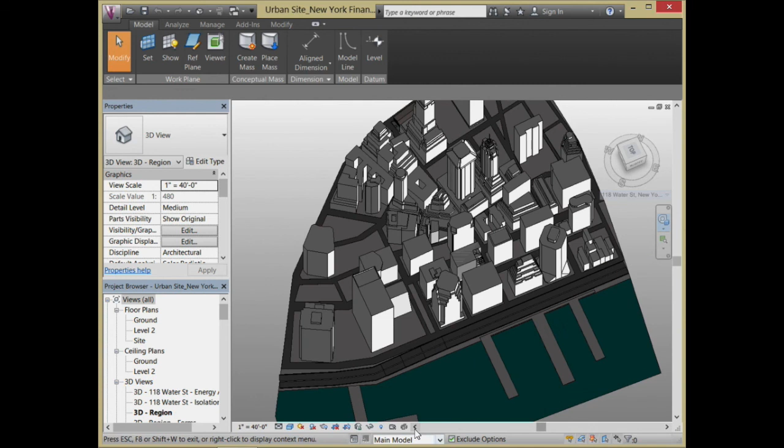Okay, just to give you a sense of how this works. This is a tool. This is a basic little building model of New York City. The idea behind this example is that we want to design something for this space. There's a site which is downtown, and within that we can take a look at some different potential towers that we could put on that site. So we have one tower that they call the Sail, which looks something like this.

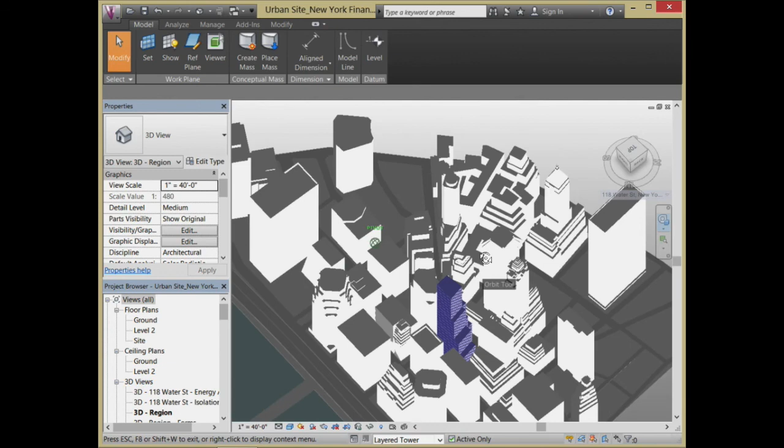Let me open up another one. Something called the Layered Tower. Let me orbit around that one. This is kind of like everyone's old vision of what New York used to look like. That's a trapezoidal tower. You can hardly see that. That, if I looked at it from the top, is more like a trapezoid.

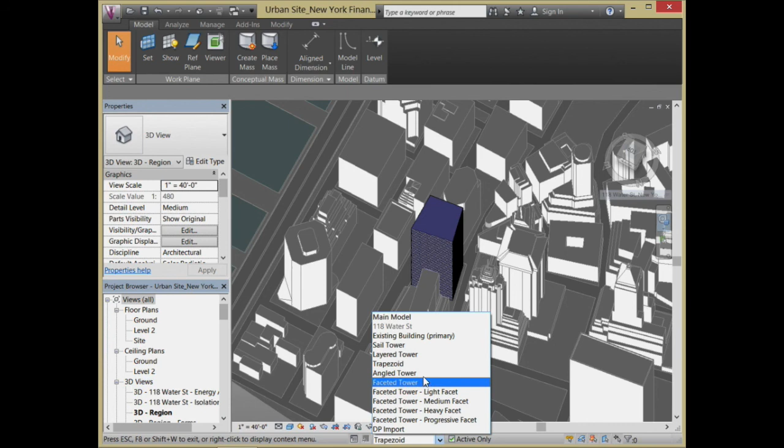Angled, kind of like two angled elements passing up past each other. Faceted, all the way up to heavily faceted. That actually looks like some towers you see built today.

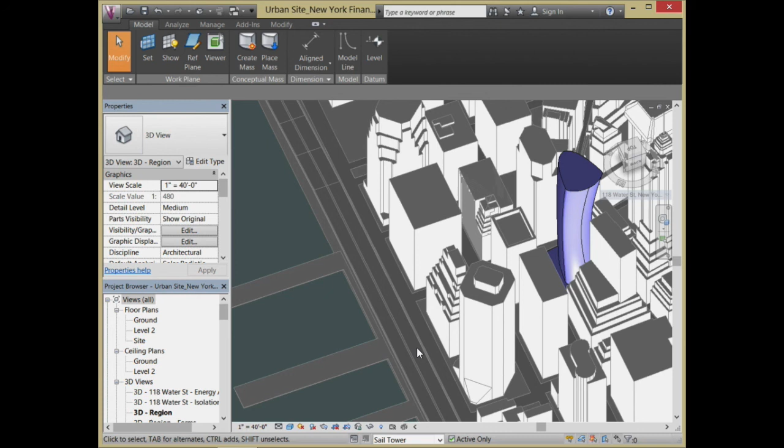And finally, progressive facet. Okay, so given all those different towers, if all of them deliver the same amount of square footage, the same amount of usable space, the question is, how do you decide which is really the better design? And that's what we're going to try and explore in this course. Let me talk about how we do that, just to set a context for it.

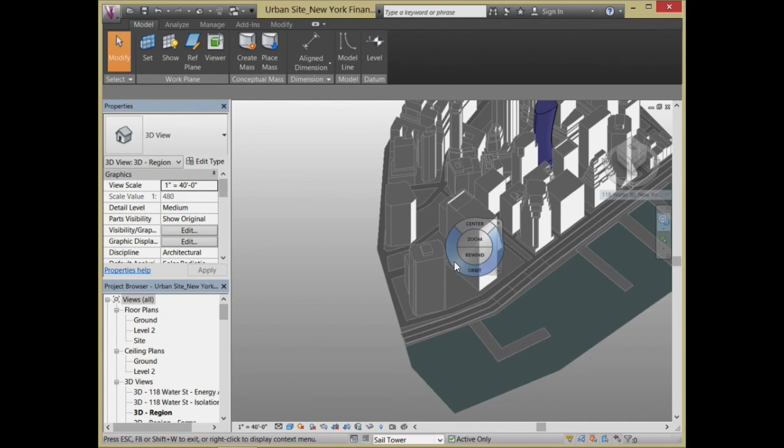The idea is, as we're thinking about these towers, or just about any design, it turns out everything's amazingly dependent on context. And that's where we're going to start off next time. Because the answer we would get for a tower and what would make the most sense for New York City would be different than what would make sense for San Francisco or Abu Dhabi or Shanghai or Singapore.

All these different locations will have slightly different answers to what actually makes the most sense. And it's based on the local climate conditions, the wind conditions, the sun conditions. All those things factor into what's going to be the best design for that local context. So what we're going to learn to do is, for each of our design options, always put it in a specific context.

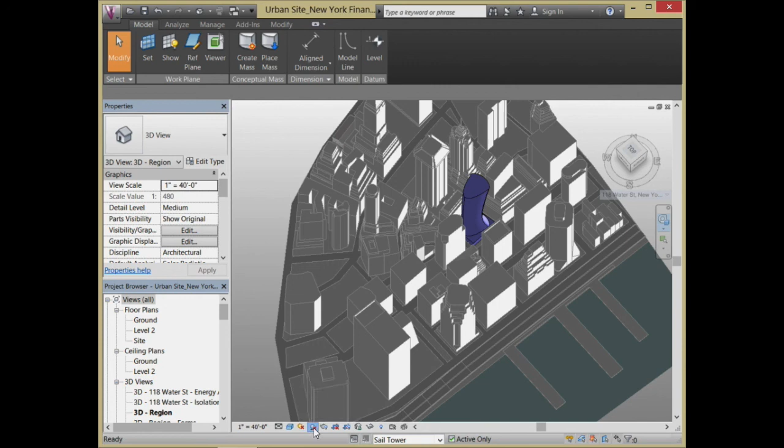A specific context that'll let us do things like, let me turn on the shadows here for a second, cast accurate shadows in terms of what's happening with our building, or look at the whole notion of, let me pull out here.

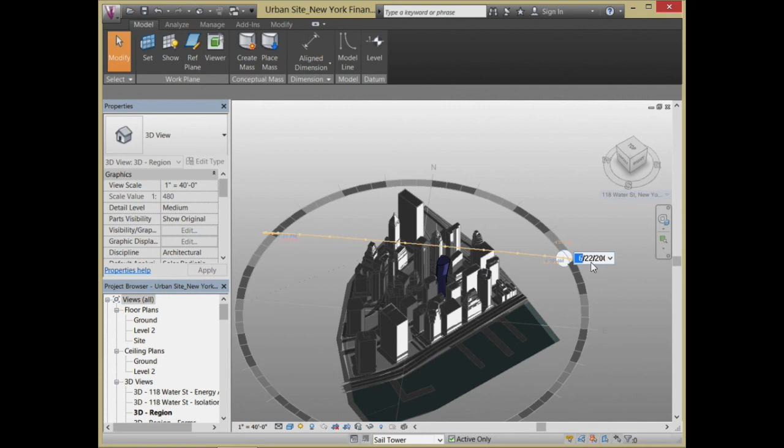What's happening with those shadows at different times of the day and at different times of the year. So for example, in June we have a certain set of conditions. If I go ahead and move myself over to December, we have a different set of shadows that are being cast. But you'll find out that's actually very, very sensitive to the location where we are. Right now we're in New York City, so in New York City you're starting to see these long shadows that are cast because we're far enough north. We have a high enough north latitude.

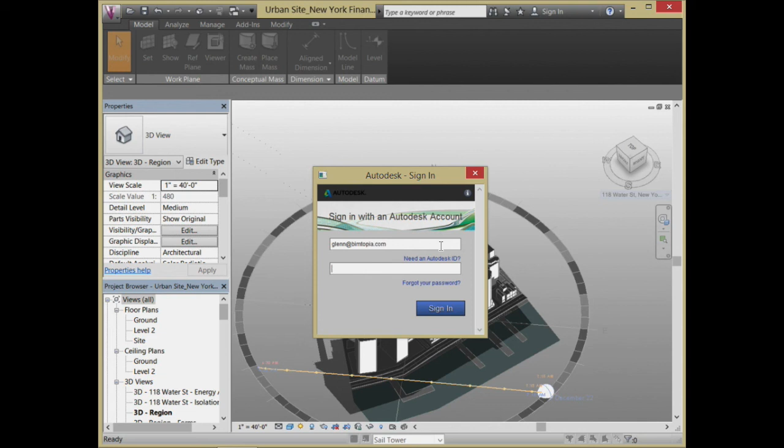If I went through and switched that, let me try that. Okay, log myself in here. Okay, give me a location that's much closer to the equator. What's a good city that's near the equator? Quito? Okay, let's try it. What's the latitude in Quito? Well, it's in Ecuador, so I'm assuming it's very close to the equator then.

Okay, very good. You notice there's different weather stations relative to, what's that? Is that the proper name of Quito? Or is that a different city? No, that's a county. Canton means county. That's fine. That'll work? Okay.

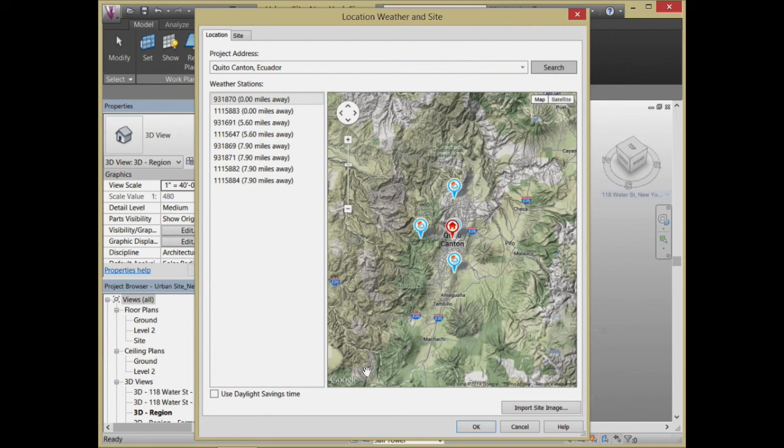There's different weather stations. There's data about weather all over the world. What's going to be important, there's a latitude and a longitude associated with this. Let me go ahead and pull that in there. Okay. And now, this is interesting. I'm early in the morning. Let me go ahead and pop up to later in the afternoon.

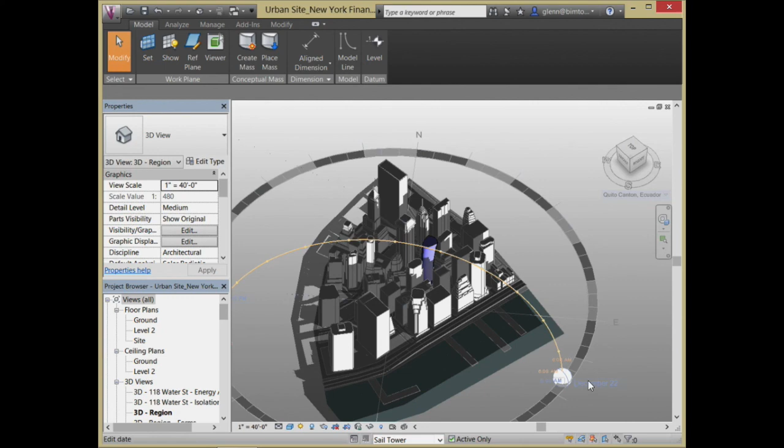That's way in the morning. I went the wrong way. 5 a.m. Oh, don't do that. No! Okay, forget that example. As usual, software will crash on me. The point is that really, as you're thinking about sun and shadows, the whole notion of location really is important.

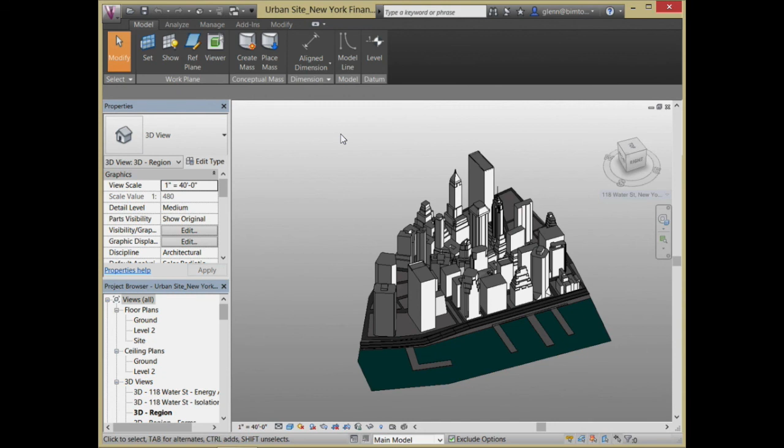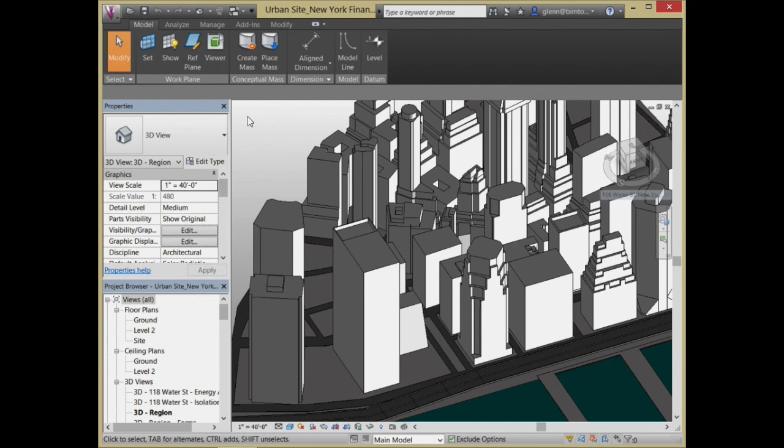Let me show you some of the other things we start thinking about relative to performance-based design. For example, here we're looking at New York again. There's this whole notion within the city of what is the effect, in a complex urban space like this, of solar radiation from all of these buildings, how do they all work together? And there's actually good tools available that let us do that. If we have a context for placing our buildings, we can start to analyze and understand the amount of sun that's hitting an individual surface. Let me show you how that works.

So there's a whole suite of analysis tools available to us. They're all about informing our design. One thing is the amount of solar radiation on any surface. That can be really useful for understanding how much solar radiation is hitting our surface, then we know a little about how much potential we have for photovoltaic generation on our own surface, or we could think about how we're shading other buildings, which is also a very big impact in terms of a lot of the planning we do these days. So I'll just select a relatively simple one.

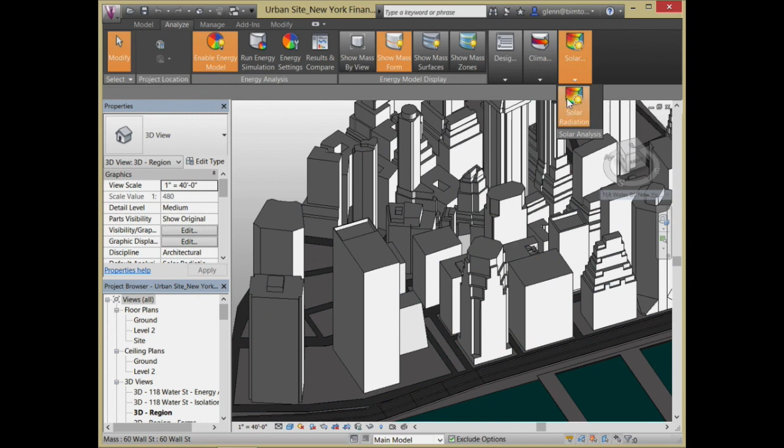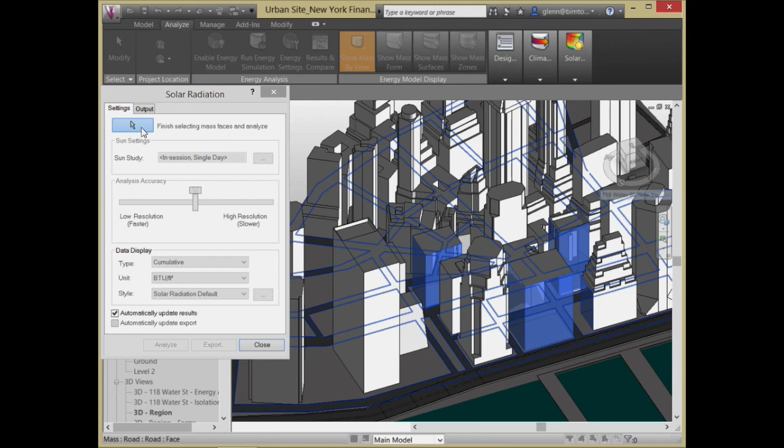I could do it for almost any surface in the model here. But the idea is that we could just choose some surfaces. Let me grab that surface and this surface, and I'll grab that one over there, and some of these ones that are down in the canyons. Okay. What we'd like to do is understand a little about the solar radiation and very quickly get some feedback.

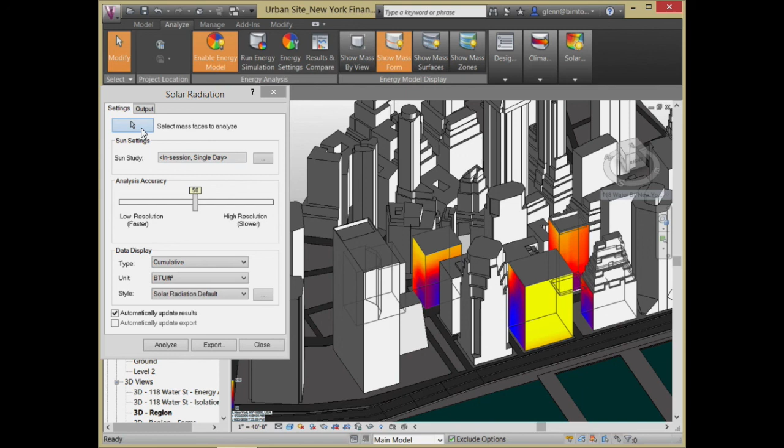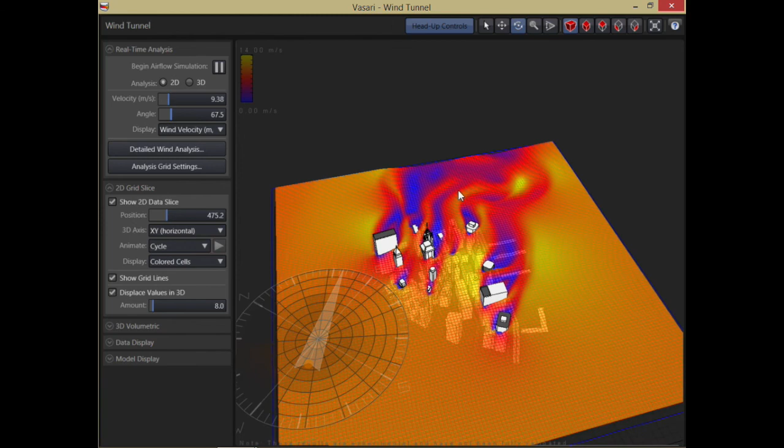Right? And that's the kind of thing we want to start thinking about. For any different building design that we propose, what is the impact of the solar radiation? One of the other things we're going to start looking at, though, is something like this. Okay, this is that same context. This is actually a wind tunnel. Let me go ahead and just pull that down a little bit so you can sort of see.

The idea is, in this case, the wind looks like it's coming from sort of the southwest over here. You're starting to see that there are different high velocity zones and different lower velocity zones. In certain areas, like right in here, we have a real little wind tunnel. Also coming up this way, we have a little wind tunnel going on there. There are some spots that are a little bit deader.

And we can be thinking about this at the city level. We could be thinking about it at the building level. So as you're thinking about a building and trying to figure out, is that rooftop garden actually going to be bearable? Is anyone ever going to be able to sit up there? Or what times of the year can they sit up there? You can actually start analyzing and determining these things.

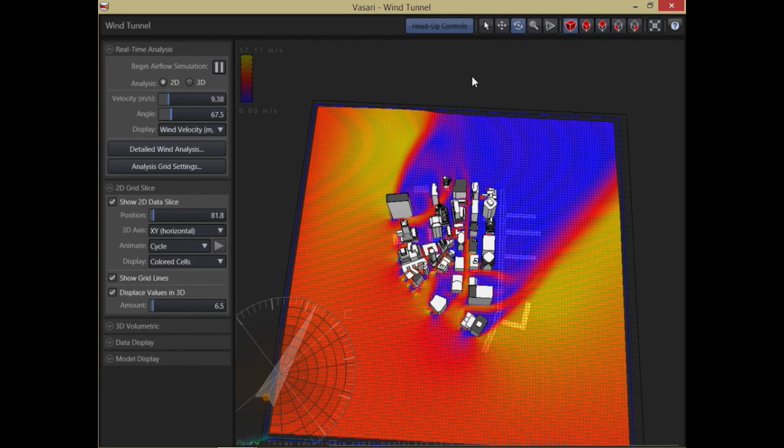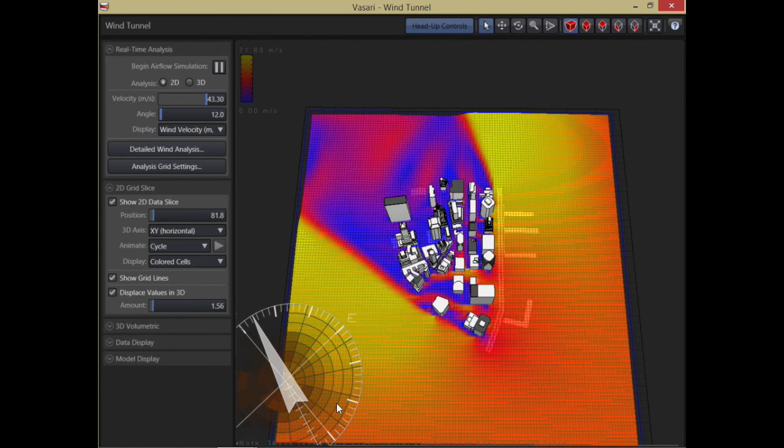Go ahead and I'll pop this around. If we want to go through and, for example, change the wind to, come on you, there you go, a different direction. We can go ahead and do something like that and really understand what it's going to be like. And this is not really arbitrary. It's actually very deterministic. Let me show you how this works.

For a specific city, there's something called a wind rose, which will show us at different times of the year, in this case the entire year, what is the predominant direction of the wind and what is the intensity of that wind. In New York City, it looks like the predominant direction is from the northwest here. That's probably the most predominant direction for the wind. So if we're looking at it year-round, that's the effect. What's going to change that around a little bit?

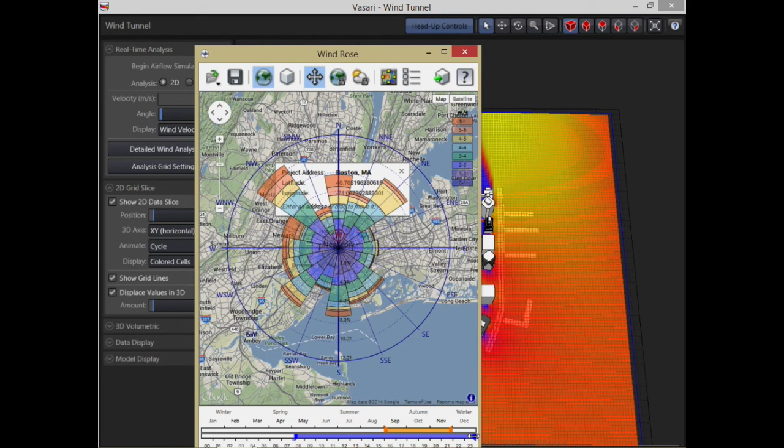If I'm looking at it in the wintertime, you'll see that it's actually coming from the west-northwest. If I'm looking at it for the summertime, though, it changes quite a bit. It's coming from the south. If we look at autumn, it's coming from straight in the north. And even there, we could look at different times of the day. This is from midnight till midnight. If we want the daytime effect, let me look at the wind direction from, say, 8 to 5. Okay, it changes a little bit. It's still predominantly coming from that direction.

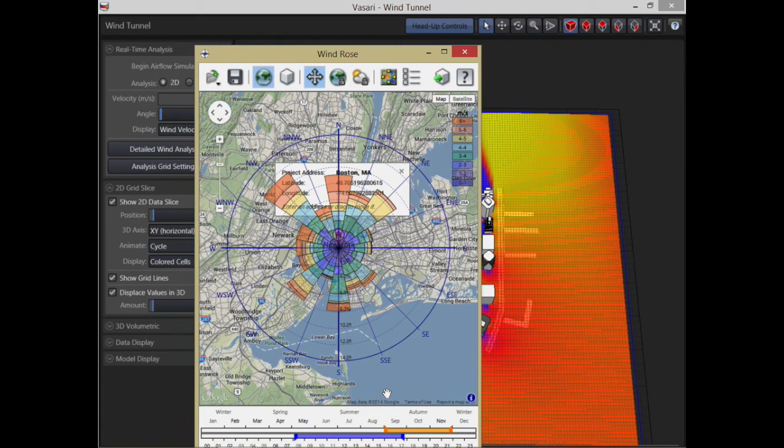But you'll find that everywhere in the world has very local wind conditions. And the idea in performance-based design is we want to think about these things and then adapt our buildings so on that windy side, we have some wind protection. On the other side, we don't. We're really trying to optimize the building for the local conditions. Okay, so that's the beginning of performance-based design.

Where we're going to go after we start thinking about things from a performance-based standpoint, though, is really thinking about these buildings as a series of different integrated systems. Let me just give you an example of one that's put together, so you can see where we're going with this. And then we'll wrap up for tonight.

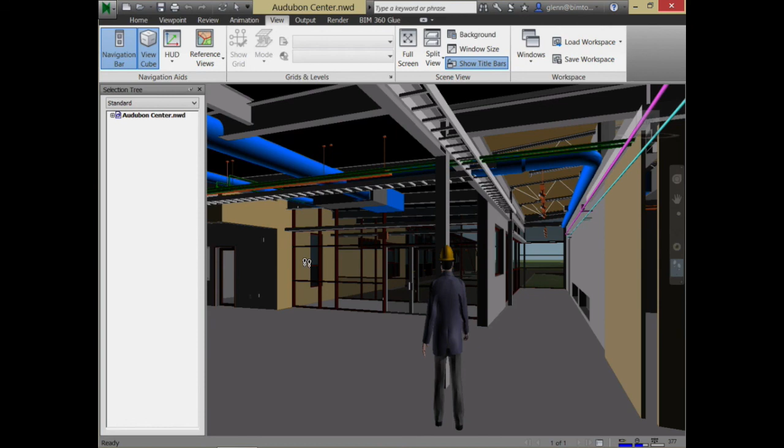I'm going to open up this tool, Navisworks Manage. I think a lot of you have played around with it, especially here in the construction management program. I'm going to open up a series of models that were created of something called the Audubon Center. Okay, and this is kind of a nice little building that has a lot of the different systems articulated in

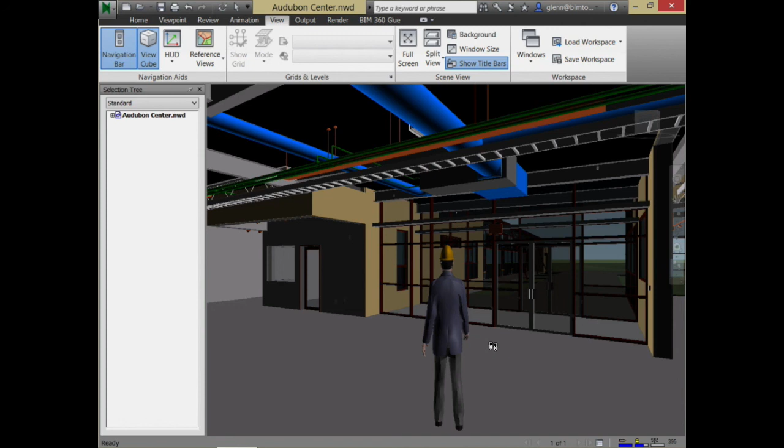them. So as we go through and do our design, in 110 or in 120A, we were very much interested in the architectural features, the doors, the windows, the ceilings, things like that. You see, this building actually has some other things going for it. If you look above here a little bit, it has lighting, it has ductwork, it has structural systems, it has all these things. And what we're really going to learn to do is actually start stripping away a lot of these layers.

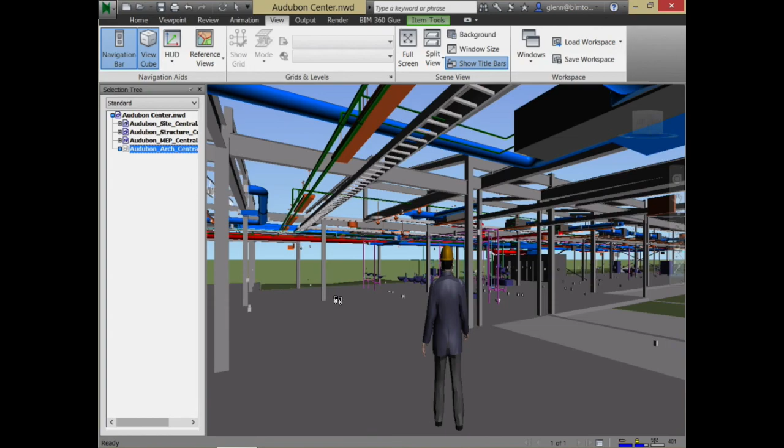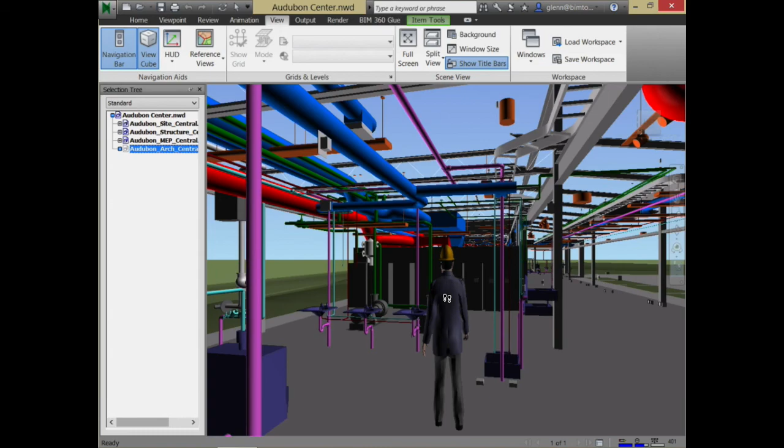So for example, let me hide the architectural layer so that we can really start thinking about this building in terms of the structural systems, the lighting systems, the mechanical systems, and how they all work together. So we may never have really thought about how a bathroom is arranged, in terms of both the water supply and the water waste. Looks like we have some pumps over here back in this room.

But even to think about all the ducting systems, both the supply ducts and the return ducts and how they're all working together. It's really trying to understand buildings at that much higher level where, behind those walls, above this ceiling, there really is an incredible complex network of things that are all working together to deliver the air, deliver the water, and deliver all the systems to where they need to be. But it's typically hidden, and most people never really get much of an understanding of it.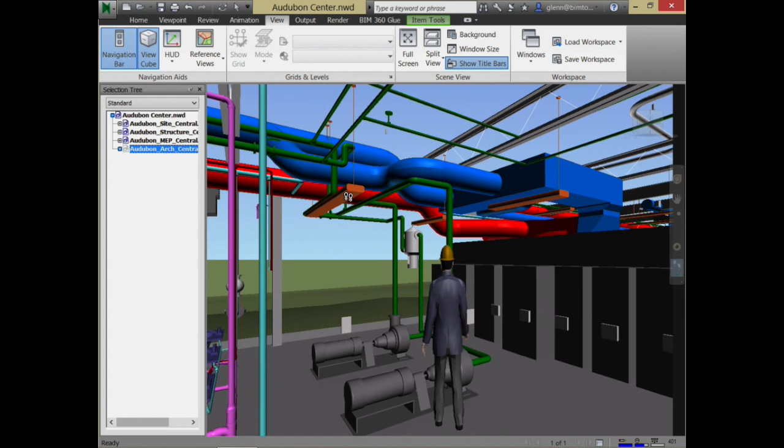But that's what we're going to be doing together, really learning to understand all those things, and then for each of those different things, being able to say that this specific pump has a set of characteristics. Looks like it's some 100 gallon per minute pump, but it has a very specific requirement. We're going to learn not only how to size things like this, but how we size all these systems and understand as they go routing through the building with all the bends and twists and turns, not only how to avoid conflict with other things, but to understand what the efficiencies are.

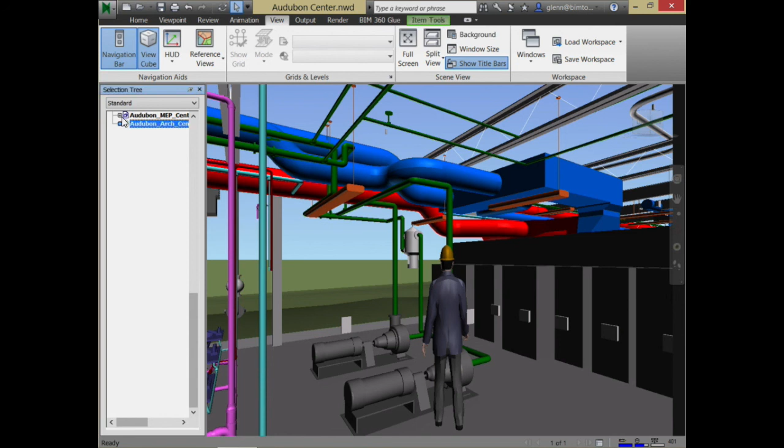Because for each of these different systems, for every bend, for every turn, we lose a little energy, we introduce a little bit of friction to the system, you're ultimately making the system work a little bit harder. So the pumps have to be sized up a little bit. So all those things have a huge impact on what's going on. So really, that's where we're going with the course, learning to look at buildings in terms of all these underlying systems. And at the same time, hopefully still be able to appreciate the architectural systems that are happening at that high level.

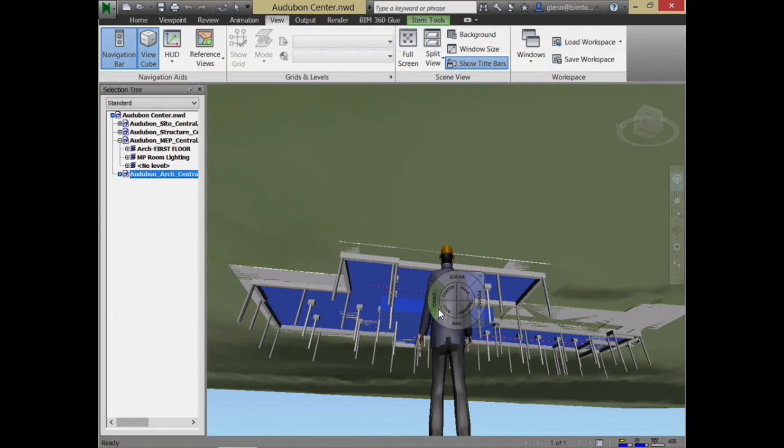Let me pop back in here. There we go. Looks like I'm in the heart of the building. Pop back out here. Nope, through the restroom. Trying to get back to any place that looks reasonable. We'll get on out. I'm floating in air upside down. That's not very good. Oh, there's the foundations. I saw all the piles right down there. Okay. But then up underneath it. Go ahead and take a look and understand the building.

And then we take that and start articulating an envelope relative to those so that the different sides of the building actually reflect the local conditions. And then we'll move into more of this systems design and all the circulatory systems that work around inside the building. Okay, so let us break there for tonight.